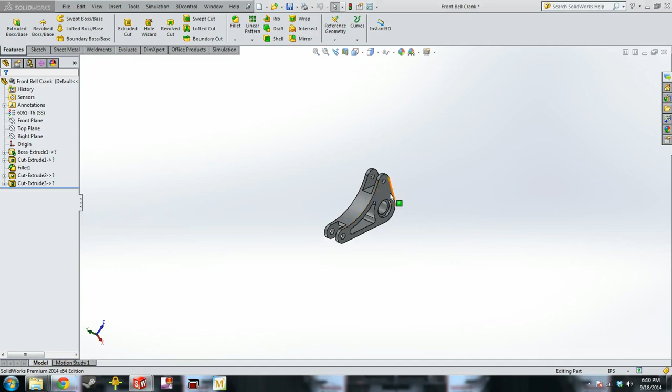Hey guys, I'm going to have a quick tutorial video on how to run FEA for some of you that maybe haven't done it, and show you what you're going to want to look for when you do a test on a part. So we'll start with, I've got two parts that we'll look at. We'll start with Robert's bell crank that we have here.

If you don't already have it open on the computer, go to Tools and Add-ins, and you're going to want to hit this checkbox for SolidWorks Simulation, and that'll open it all up. Then you'll go to the tab. You can hit New Study Advisor, and SolidWorks will walk you through it, but it's a real pain and I don't recommend it. So we're going to hit New Study.

SolidWorks has a lot of different types of studies that you can do. I have not done most of these, and in all likelihood you guys will never do anything but a static analysis. Maybe a fatigue analysis if we did a lot of aluminum parts, but our parts never see enough cycles to really worry about that. So we're going to do a static one.

Because you guys are working in the Dropbox with these parts a lot, it's a good idea to move where the simulation files go because they do take up a lot of space. So to do that, you right click on the static, hit properties, and then your results folder. You can change it in here. I just do mine on my desktop in a scratch folder.

Okay, so the three main things that you need to run a simulation is you need correct fixturing, a load of some sort, and a mesh on the part. Depending on what you're doing, sometimes one of these can be a real problem. With a lot of these parts, they're simple enough that it's not really a big deal.

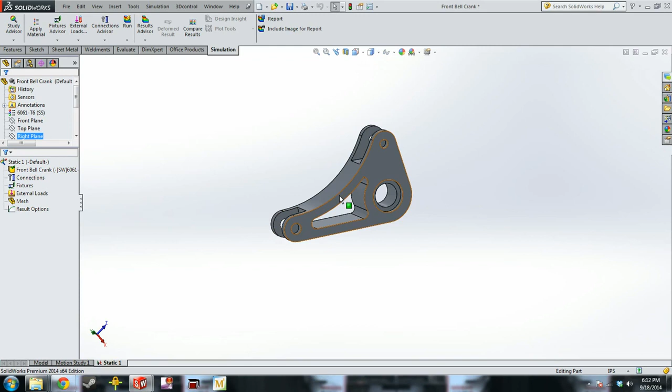So a quick lesson on how a bell crank works is it rotates about this axis when the push rod gets pushed by the wheel and then compresses the shock. So it's connected by two force members. So the loads going into the bell crank are going to be perpendicular to the holes basically.

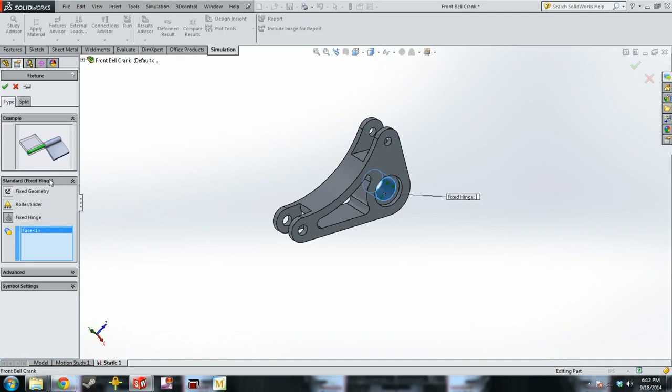So what we're going to do is we're going to start with our fixturing. Because these parts can rotate, we will kind of model that. So we're going to start with a fixed hinge. SolidWorks 2014 has these nice images to show you what each mate pretty much does. So as you can see, a fixed hinge is exactly what it sounds like, a hinge. So we'll put that on there where the bearing goes, hit check, and then our part isn't fully defined because

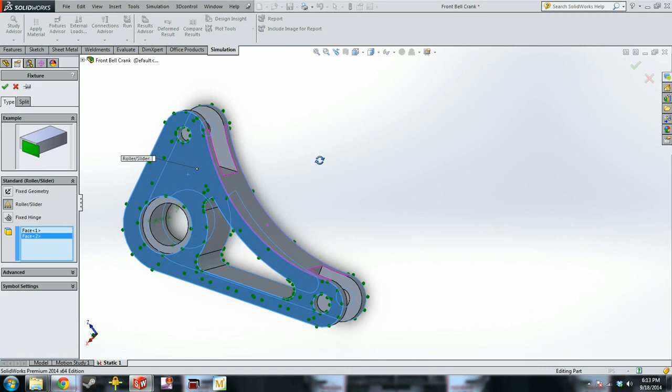it could still move laterally. So we have to go in, and SolidWorks will pop up an error if your part's not fully defined, and then you'll have to go back and figure out why and where you need to put stuff. So we'll put fixed sliders or roller sliders on each side here, and our part should be fully constrained.

Now, since we have our fixtures, we're going to come in. There's a bunch of different forces you can use. The only two you're probably going to care about are torque and force. So this one's going to be a force.

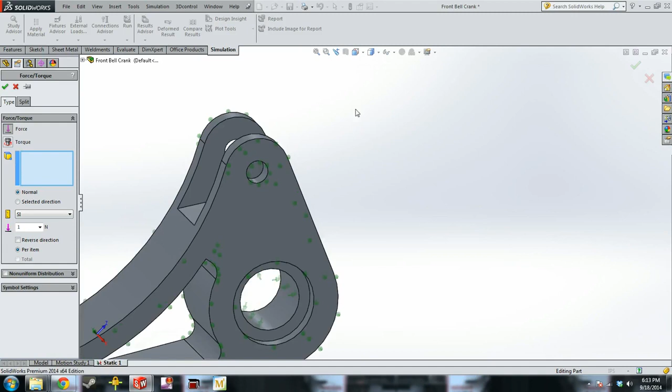Not on that face. So our forces are going to be from the reaction force from the shock and the push force from the push rod. So we're going to click the inside of that hole and that hole, and we're actually going to change the direction because it's not a radial force. And while it should technically go in this line here, we're just going to select this one for ease of the video. And then we're going to put, we'll say 30 foot-pound or 30-pound force on it.

Got to be careful if you do hit enter after you enter something like that. Sometimes it will change your value back to the base value. So right now, this is putting 30 pounds on this hole and 30 pounds on this hole, or 15 pounds on this hole and 15 pounds on this hole. So if you wanted 30 on each, you hit per item. We want it just total.

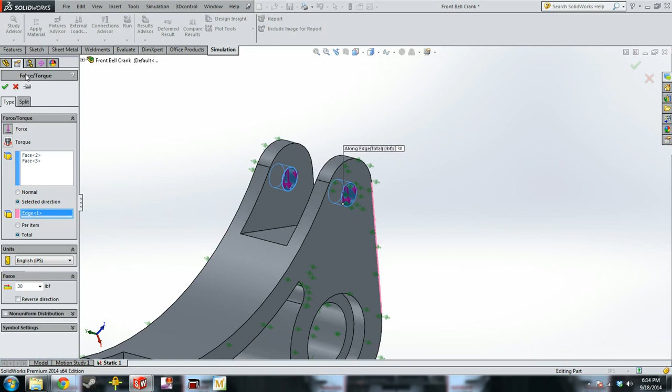Then we're going to do the same thing on the opposite side. We want our selected direction. You can also select a face if you wanted, and then use these for your different directions. It doesn't necessarily have to be a line.

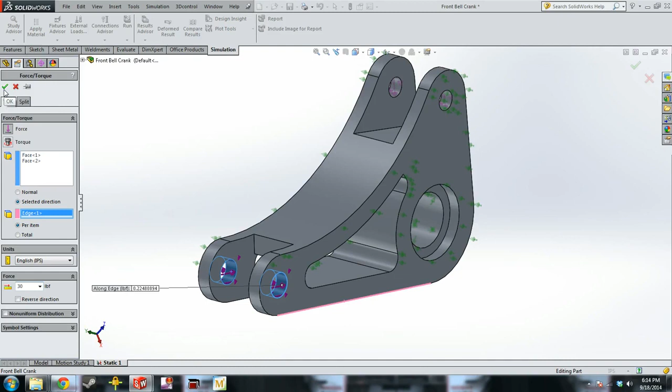30 foot-pounds — just pounds. Check. All right, so we've got our constraints and our forces, so we have our mesh left.

You can just hit mesh and run, and SolidWorks will automatically create a mesh. It'll just be the standard default mesh. Depending on what you're doing, that may be fine, but we're going to create our own mesh.

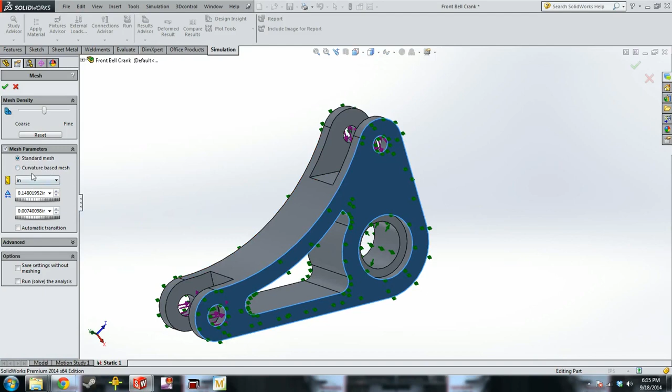If you hit mesh parameters, it'll show you two different types of meshes. I'm going to show you another part where you can see the difference between a standard mesh and a curvature mesh, since this part doesn't show it very well. But for this part, we're just going to do a standard curvature mesh, and make it nice and fine.

The fine and coarse setting on the mesh defines the size of these triangles. Obviously, the more coarse it is, the more area each triangle represents, so you get a more blocky result view.

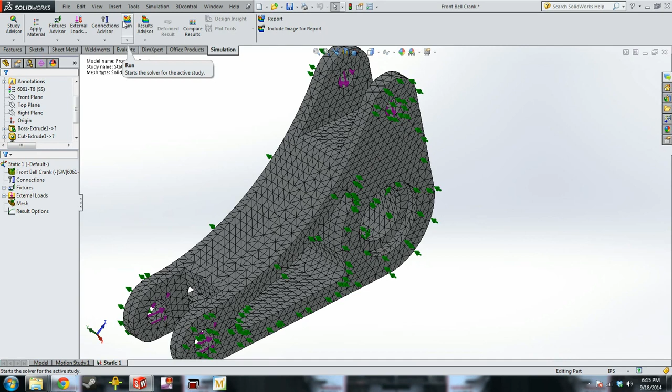So we've got our three things: we've got our forces, our part's fully constrained, and we've got our mesh. So we can hit run up here, and Cosmos will do a thing.

Oh, maybe our part's not fully defined. So often, if your part's not fully defined, you'll get a pop-up like this asking if you want to do small or large displacement. We don't want large displacement.

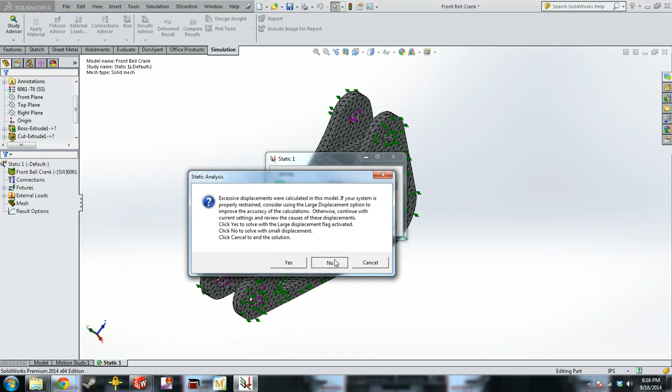And we can look at this displacement, and it moved 6 times 10 to the 8th millimeters. So something obviously wasn't constrained, because it's just pushing the part off the screen, more or less.

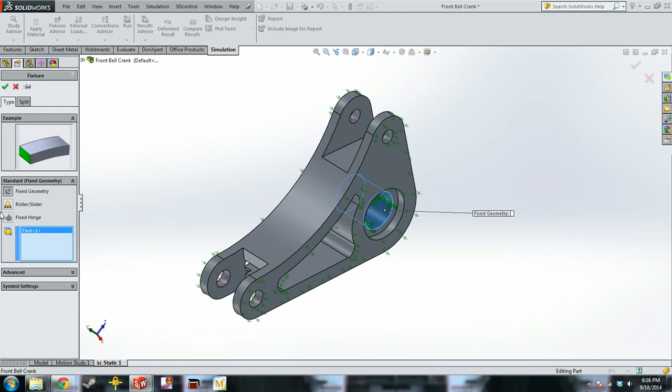So we'll go back in, add a fixed geometry, and then delete the other two. If you have a fixed geometry on a part, it is pretty much always constrained from movement.

So we'll rerun again — we had no large displacement this time. You can see the part looks kind of funky now.

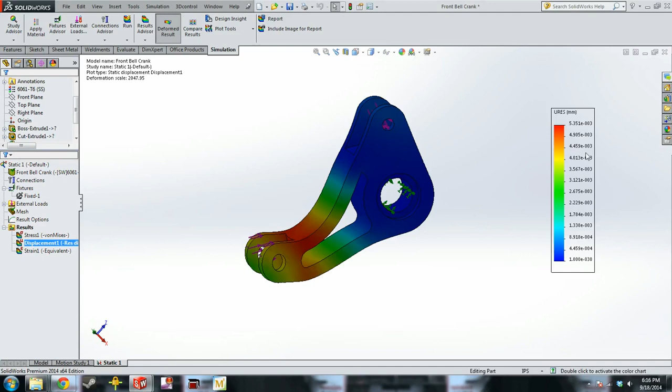It looks like it's going to fail, but while it looks that way, the part only moved 0.005 millimeters at most in this area here. That's just the deformed result from SolidWorks — it creates a deformed result that's multiplied by something like 1,000 times, so you can actually see where the deflections are. You can hit undo on the deformed result to show the regular part, or leave it on.

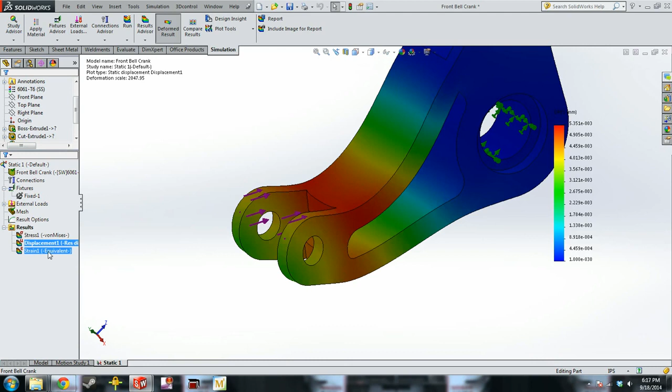It's up to you guys, but just be wary — while it may look funky when you're done, it may not actually be flexing anywhere near that much. So you've got your stress plot, which we can go in and edit the definition of.

I don't particularly like metric units for these things myself, so we can go in and change it to PSI. Your scale now is in PSI, and you'll have a yield strength down here. The scale automatically scales to the min and max pressures on the part. Our max PSI here is 1,800, where our yield is 40,000, so we're not even close to yielding this part yet.

When we talk about parts, one of the big things we look at is safety factor. If you haven't learned yet, safety factor is basically just the relation of this von Mises stress to the yield strength. SolidWorks happily lets us make safety factor plots so you can see those things.

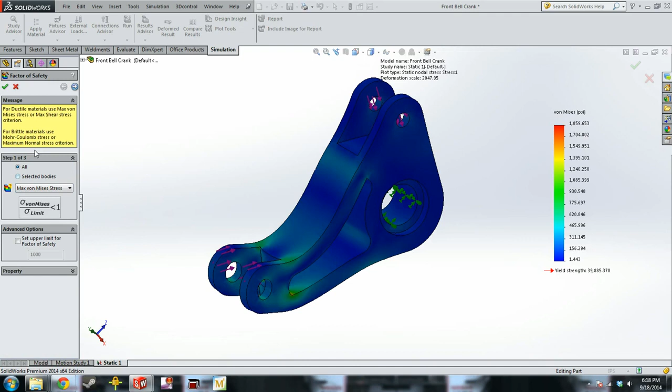So you right click on results, define safety factor plot, and then since most of our safety factors are von Mises stress based, you'll just hit that and hit check. It looks like a lot of red, but again, that's just SolidWorks doing default things.

So what we're going to do is go to chart options. We're going to show minimum safety factor, maximum safety factor, and change this whole scale to a max of 10 and a min of 0. That'll change the colors of the part. Then we're going to go to floating points so you can actually see what the values are.

Oh, I don't think it changed. Let me try this again, I don't know why it didn't take it.

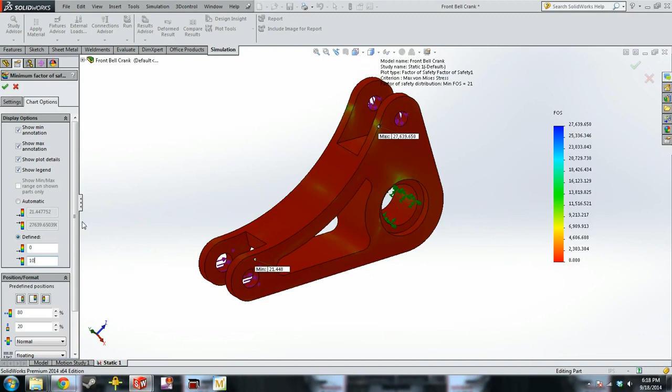There we go. So you can see our minimum safety factor is 21, so it's well above 0 to 10. If you don't know what safety factor is, anything at 1 or below is going to fail at that point, and anything 1 or above is below the yield point of the material you're using and will be safe.

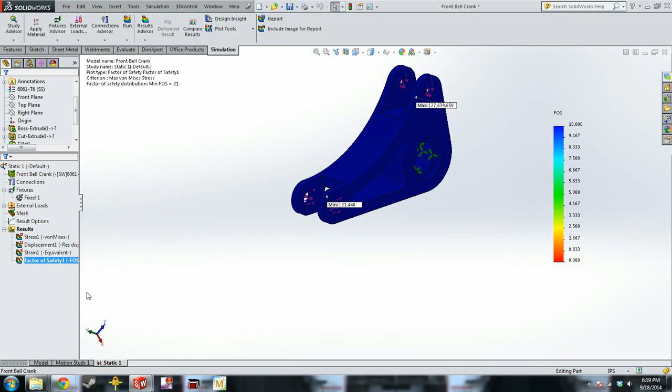So when you're designing for formula, we often shoot for a safety factor of 1.5 just to make sure it's light enough but still safe, because you don't want it to break the first time out. Subsystem leaders will be able to give you better tips and advice on what we're looking for in parts.

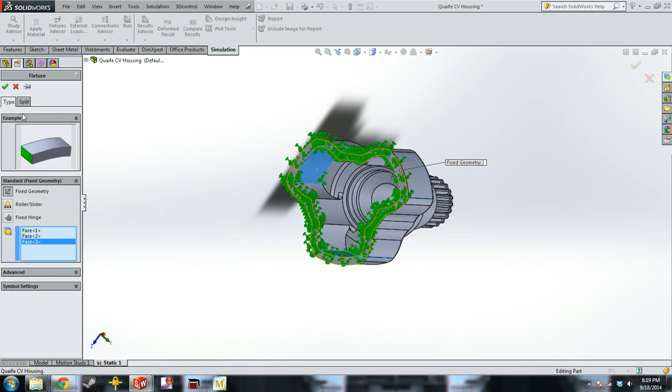So we're going to look at this other part, so I can show you the difference between a standard and a curvature mesh. We'll do the same thing: new study, static. We're going to apply our fixtures. This one we'll just apply a fixed geometry on the inside here and see how much torque it takes to break it. Go to external loads.

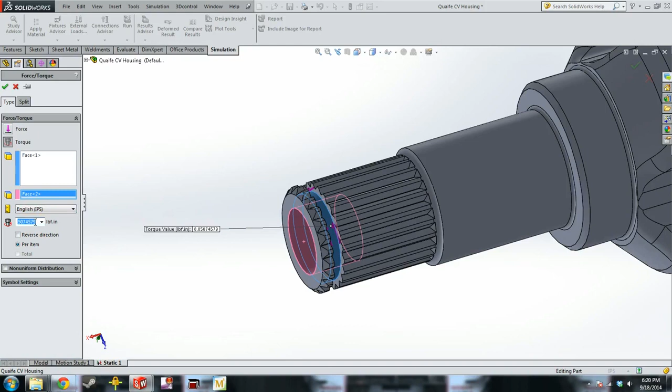We're going to do a torque this time. We'll just apply it on this face. When you do a torque, it'll ask you for a cylindrical face or an axis of the part, so we'll give it that. We have inch-pounds, so we'll put 1,000 inch-pounds on this piece because it's pretty strong.

A more representative simulation of this piece would be to put the torque on each of these splines, but I'm not too inclined to click on all the splines right now.

So we've got our fixtures down here, we've got our torque up here, so we need a mesh. We're going to hit create mesh. Now I'm going to show you the difference between curvature-based mesh and standard mesh.

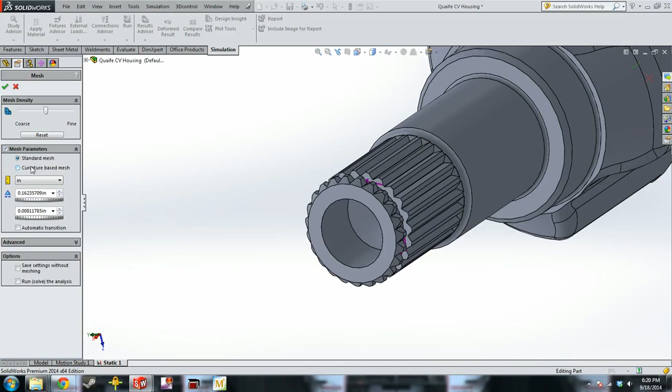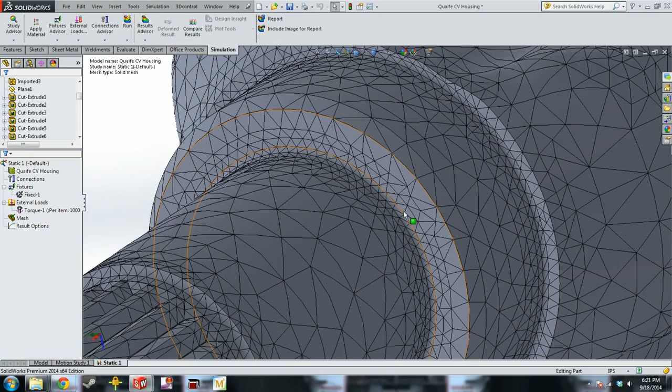So we'll hit curvature, make it fine. If you're doing large things, make your mesh less fine, but for a single part like this, I usually make it pretty fine because the computer handles it fine. As you can see on this part where we've got some fillets here, the mesh area gets smaller around the fillets and it's larger along this spline area because the computer figures out that this is a stress concentration area, so that gives you better resolution on it.

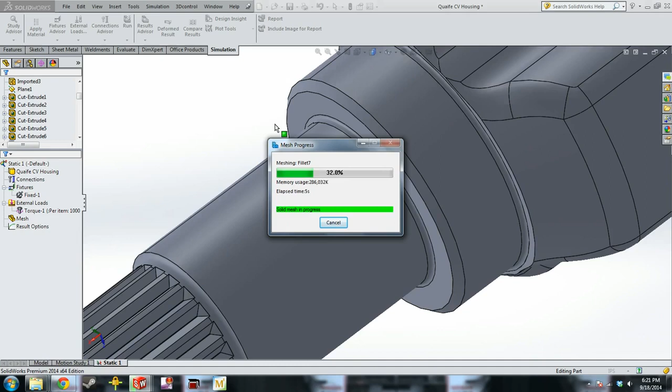So then we'll make a standard mesh, also make it fine. With the standard mesh, you'll see all of the mesh triangles are the same size no matter where they're at, so they all cover the same area basically. If you do a standard mesh, you can go in and create a mesh control.

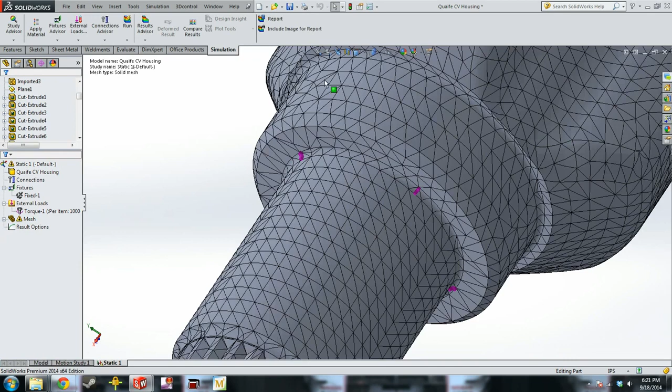Let's say we're really worried about this fillet breaking for whatever reason. So we can hit that and make it super fine and apply it, and then we'll rebuild our mesh.

And hopefully, if I did it right, it should be smaller around this fillet. Yeah, so you can see how our triangles are smaller around the fillets to give better resolution in high concentration areas. My recommendation is just use a curvature mesh, let the computer work for you.

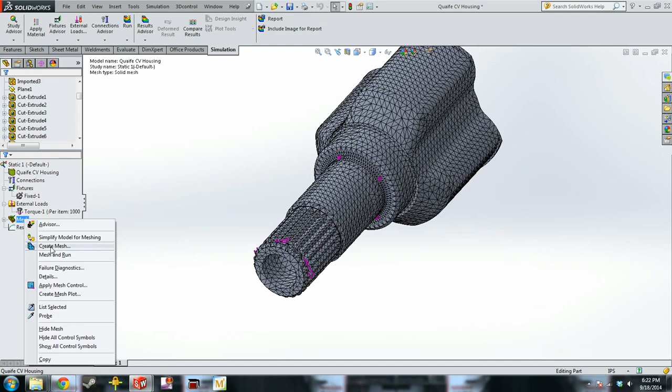There's no reason to do a standard mesh with mesh refinement unless you run across a part for whatever reason that you can't actually use a curvature mesh.

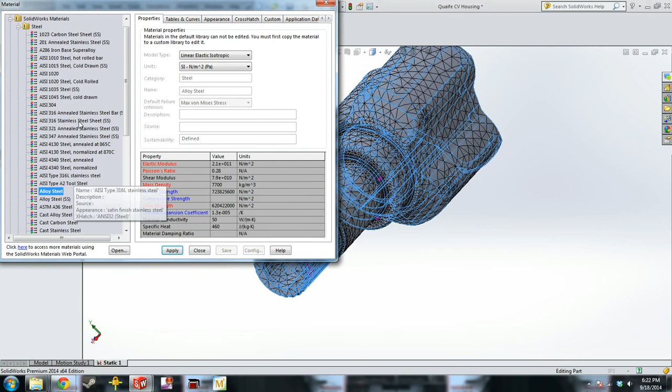Now we have our mesh. Oh, so this part doesn't have a material defined. So you'll right click on this, apply edit material, and we'll just pick something.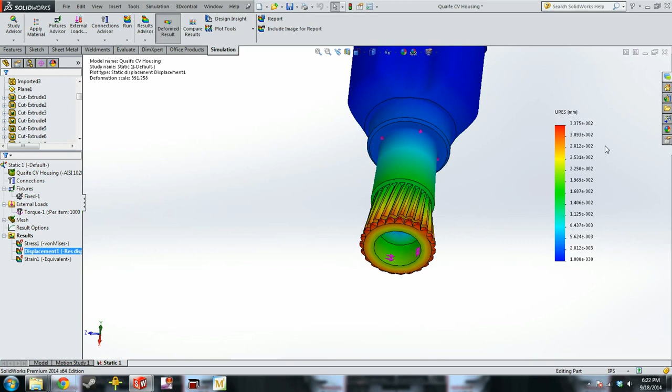And so it looks like our part is completely deformed, but we will look at the displacement plot, and you can see it moves 0.03 millimeters. So while it looks like it's deformed a bunch, it actually hasn't. So again, be wary about the deformed results in Solidworks — it can kind of skew your perception of what's happening.

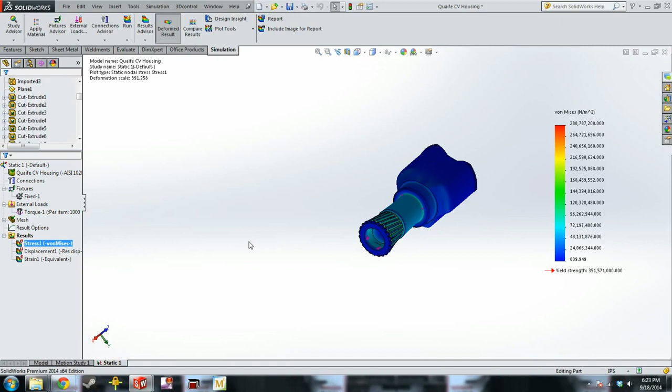And that's about it. So if you guys ever have any questions on running an FEA, talk to your subsystem advisors. Most of them are pretty good at running this stuff, so they'll be able to help you on whatever you need. All right.